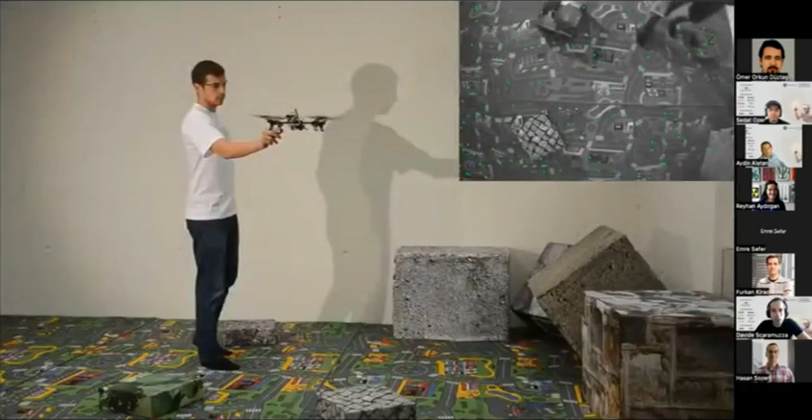What you can see in this video is an autonomous drone using a single onboard camera to stabilize itself. This was a demonstration we gave 13 years ago, in 2009. Here the drone is being disturbed and is able to use a single onboard camera for stabilization. How does it work?

What you can see in the top right video is the onboard video, and you can see that we are detecting key points. These points are basically called features. They are points with high contrast that are easy to redetect when the drone navigates, and we use them as reference points. So if the drone is disturbed, it tries to restabilize by keeping those points exactly where they were detected in the first place.

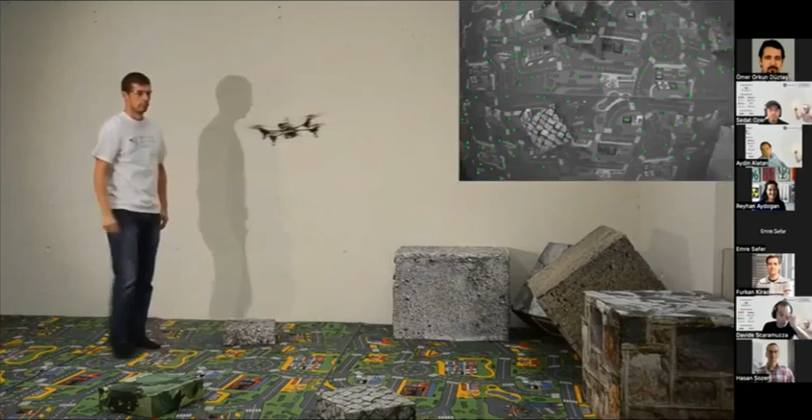The interesting thing is that you can use the same technique to map the environment. Once you have a map of the environment, you can navigate autonomously because you can identify obstacles, and then you can also set waypoints and the destination you want to reach.

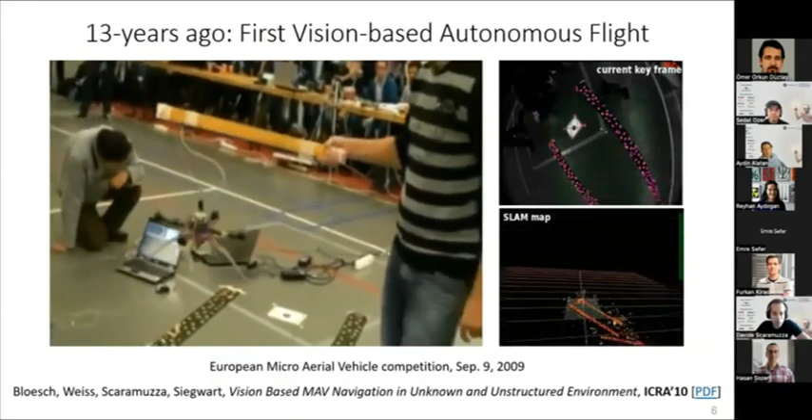This was the first vision-based autonomous flight, September 9, 2009. It was at the European Micro Aerial Vehicle Competition, which we won in the autonomy track. It was the first vision-based autonomous drone.

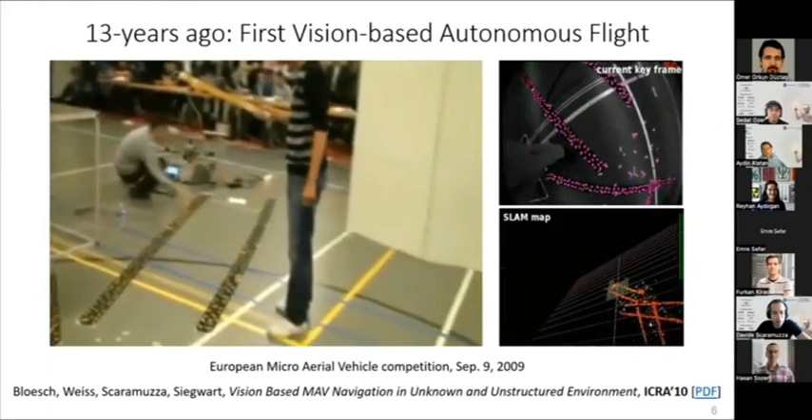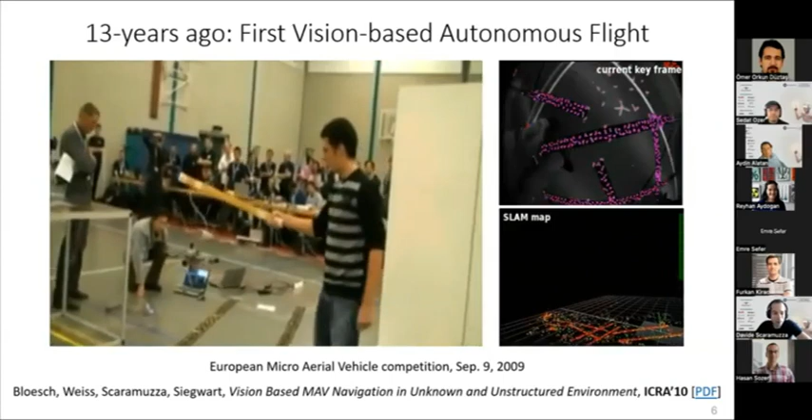At the time, the regulations didn't allow flying drones freely, so we had to secure the drone with a fishing rod, which you see here. The drone was autonomous, but was just secured in case things wouldn't turn out nice.

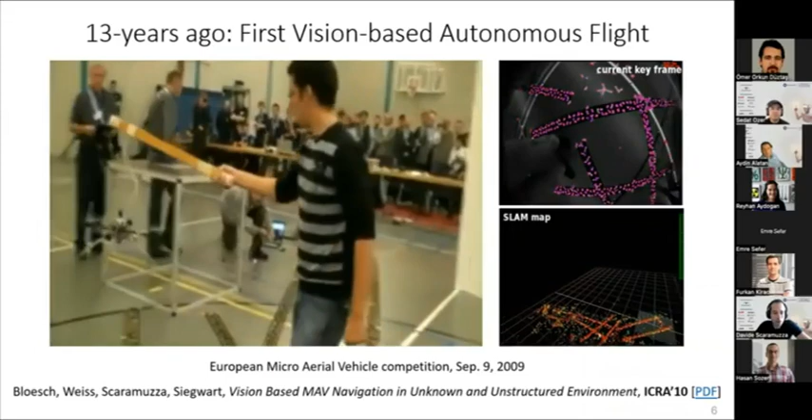Also, at the time, the computing power to do the whole mapping and motion estimation was not capable of running onboard, only offboard. So we streamed the images to an offboard laptop using a 20-meter long USB cable.

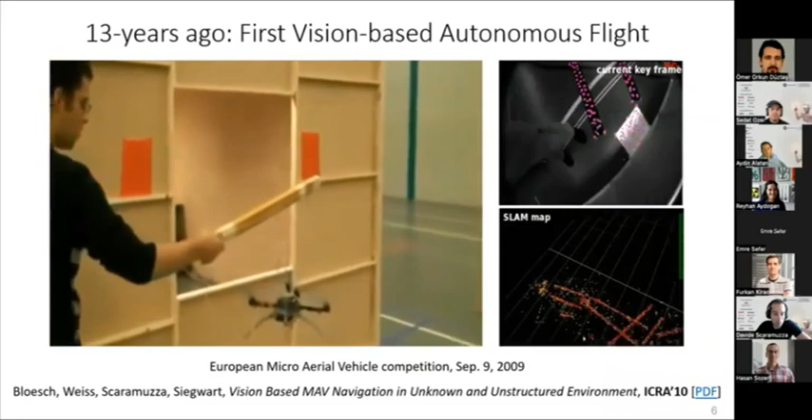Here comes the moment when the drone is supposed to enter a small window. First we pass the fishing rod, and then the drone passes. On the right, you can see basically what the drone sees. On the top right, the camera onboard the drone with the detected features, and in the bottom right video, you can see the map being expanded in real time.

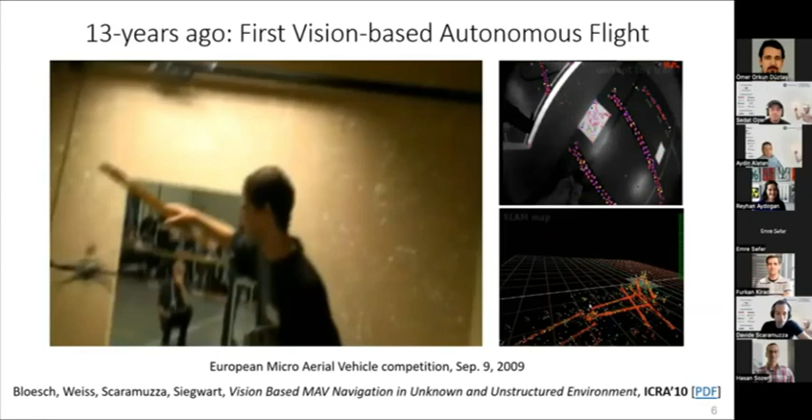So this was in 2009, 13 years ago. Where is this technology now? Well, the guy you see in this picture is Stefan Weiss, who then went to JPL, NASA Jet Propulsion Laboratory, and now this technology is on Mars.

The Mars helicopter Ingenuity, made by NASA, actually uses a similar navigation algorithm that we were using 13 years ago. It uses a single onboard camera and an onboard computer. What you can see in the bottom right is exactly the features it's extracting, so it's building a map in real time that it then uses to stabilize and follow a given trajectory.

So it's been 13 years, but now we can say with confidence that vision-based autonomous navigation is available for the market, and there are several companies that are now using it.

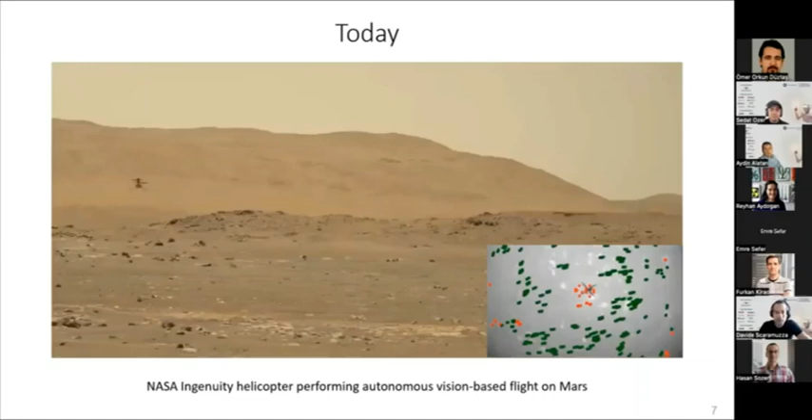For example, a very successful company is a California-based company called Skydio that is using drones for inspection of bridges and difficult infrastructure. What you can see in this video is that the drones navigate only using onboard cameras.

So they can be flown either completely autonomously or with the intervention of a human, but now the human doesn't have to send control commands at very high detail, but rather very high-level commands. For example, move at a constant speed, avoiding all obstacles, and take pictures every 1 meter. So you can now do this thanks to onboard vision-based autonomous navigation.

So now that we have drones that can fly basically autonomously with onboard vision, the question is what's next? As I told you, this was something I was working on 13 years ago, but in the past few years, we are trying to make drones much more agile.

Why? Because if you look at the performance of autonomous drones compared to human pilot performance, there is a huge gap. To see what I mean, look at this video.

What you can see in this video is not an autonomous drone, but a drone piloted by a human pilot. There is a camera onboard the drone that transmits images with 10-20 milliseconds latency. Then the human brain processes these images. The human brain is quite slow, it takes 220 milliseconds, and then computes control commands that are sent via the remote controller.

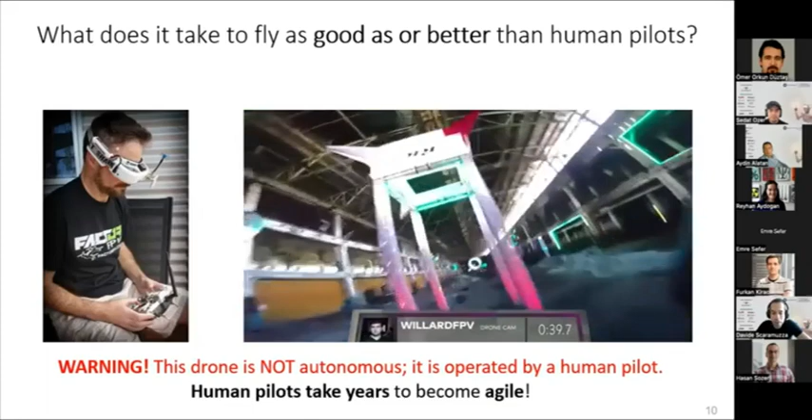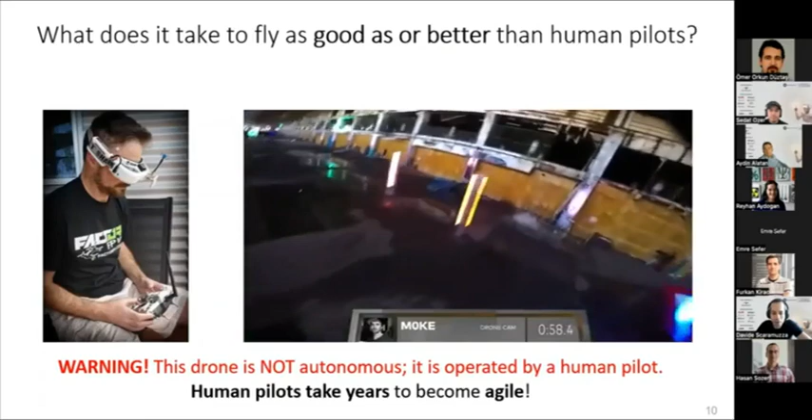What is very interesting about human pilots is that they're able to navigate at impressive speeds using just onboard cameras, so basically vision-based, and all this with incredible robustness, despite the motion blur and high dynamic range changes that occur at these speeds, and also despite the latencies involved.

So the question I've been trying to answer over the past few years in my lab is: what does it take to fly as good or even better than human pilots? We call this problem agile flight.

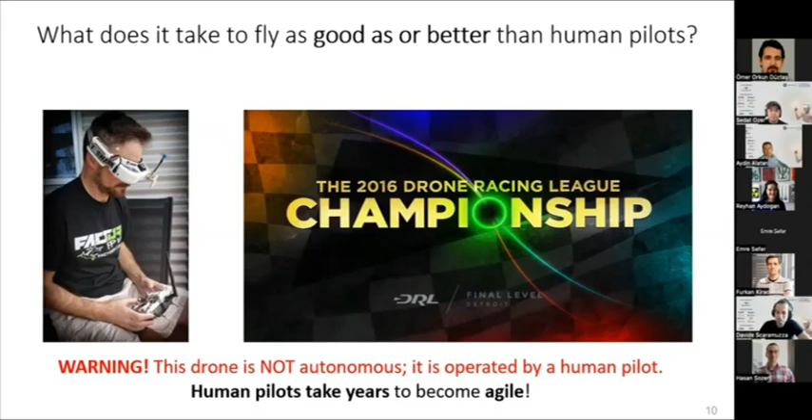And you may ask, why do we care about flying agile? Well, the first reason is actually purely practical.

By making drones faster, they will be able to actually fly longer distances. So making drones faster increases their range. You can see what I mean in this plot, showing distance flown in kilometers versus flight speed in meters per second, from 0 to 10 meters per second. The drone we're reporting here is a DJI Phantom drone.

You can see that in many inspection tasks, the drone is controlled at very low speeds of half a meter per second, which means it can fly only for less than half a kilometer. But as you fly the drone faster and faster, you can cover longer distances. By the way, these distances are calculated exactly as explained in a paper we just published, considering the maximum battery life of the drone.

The problem is that the battery life of a drone dies after 20 or 30 minutes, depending on the type of drone you're using. So if you fly at very slow speeds, you can cover very small distances. But if you fly at faster speeds, you increase their range, and so the utility of the drone.

You can see that if you fly at 6 meters per second, you can reach distances of almost 3.5 kilometers. However, if you fly faster than 6 meters per second, the maximum distance you can reach before the battery dies reduces again. Why? Because at faster speeds you have more drag, the resistance from the air, and you're consuming more energy. So the bottom line of this plot is to show that it makes sense to fly drones faster to improve their utility.

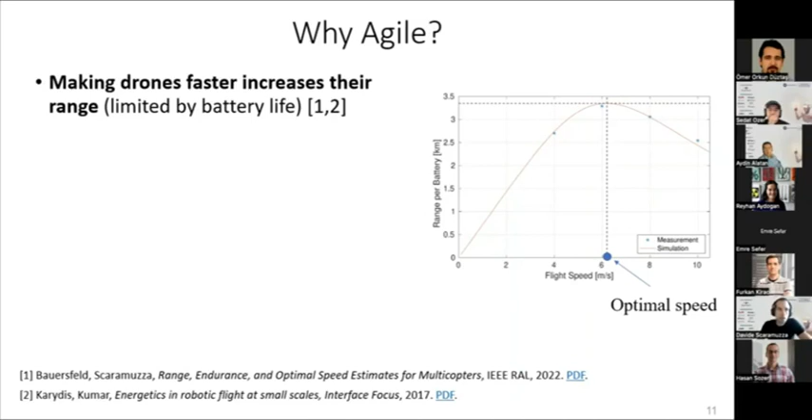Another reason why we care about making drones agile is for all those missions that are time critical. For example, search and rescue, delivery of packages, inspection and exploration, flying cars, and also space exploration.

Another reason is purely intellectual. Flying agile raises very difficult challenges for robotic research, especially for perception, planning, learning, and control. For me specifically, and all the people working on computer vision, it allows us to push the limits on vision-based navigation. That's why I love this research topic.

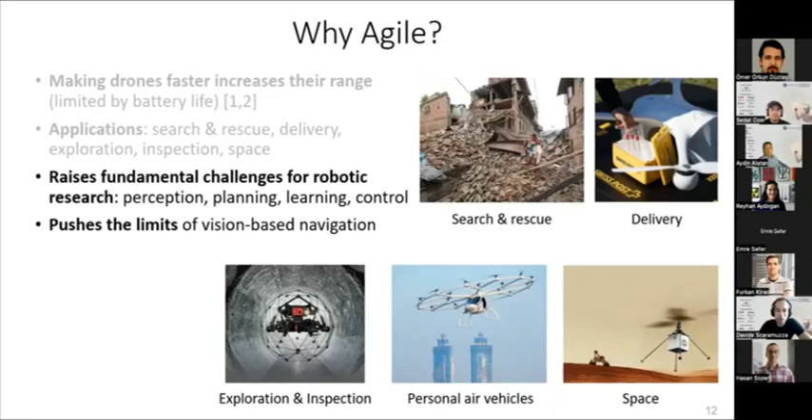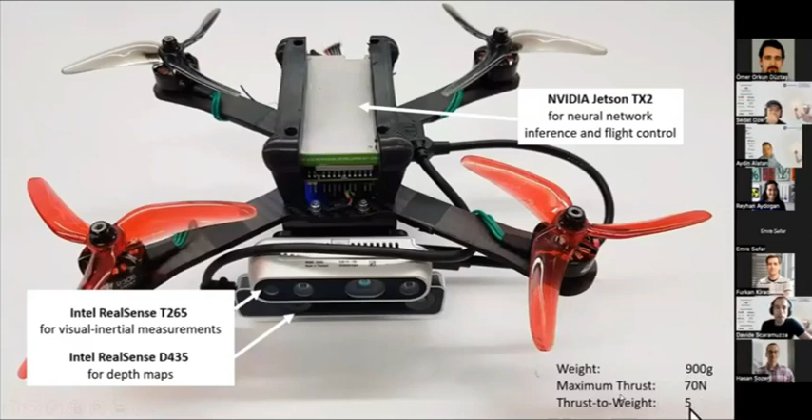This drone can accelerate from 0 to 100 kilometers per hour in less than 1 second, and can reach speeds over 130 kilometers per hour. It has a weight less than a kilo, maximum thrust of 70 newtons, and a thrust-to-weight ratio of 5. So it's quite agile, very capable.

Now, how do you control a drone? You control a drone very much like you control any other mobile robot. At the input are sensor inputs, which means, for example, images and inertial measurement units, which are inertial sensors. Then there are three modules: perception, planning, and control.

Perception typically does state estimation, computing the position, velocity, and attitude of the drone. It also computes local maps to identify obstacles around the environment that you want to avoid. This information is then sent to the planning module, which computes a collision-free trajectory that is executed by the control module, which then computes the low-level control commands, for example the rotor speeds.

Now, there are several issues with this architecture, because despite having been used for 40 years in robotics for mobile robots, it actually has some shortcomings for agile autonomous flight.

The first issue is that when you navigate very fast, you're going to have very imperfect perception. This is because at high speeds you have a lot of motion blur, light changes, and also the limited field of view will cause many of the features needed for estimation to fall outside of the field of view.

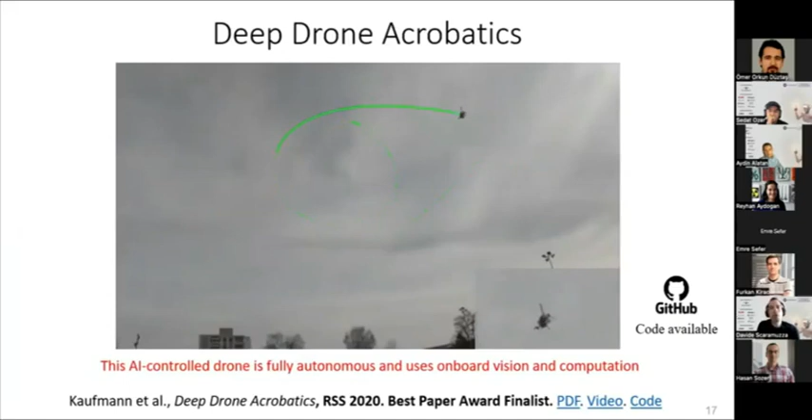I hope you can see the video. In this work, we were able to train a neural network that takes images as input and maps them directly to control commands to achieve agile acrobatic maneuvers similar in speed and acceleration to those performed by expert human pilots. For these maneuvers, the drone reaches accelerations of up to 3 Gs, exactly what human pilots experience. All this was done using an onboard camera and an onboard computer.

If you're interested, the code has been fully available for more than a year, and all the datasets have been made available too. How did we train it? We trained it only in simulation, meaning we did a one-shot sim-to-real transfer. We transferred the trained policy to the real world without any fine tuning.

What you can see is the simulation that we actually did. We used Gazebo in this case. We simulated hundreds of drones tracking hundreds of different aggressive maneuvers, simulating basically 50 flight hours for each drone in just 5 hours. So within a night, we were able to train this algorithm. Once it was trained, we downloaded the network and deployed it to the real drone.

We show in the paper that it transferred not only to real drones, but also to different real drones. Here you can see that the same policy trained in simulation transferred exactly identically to the real world. But now the key question when you train in simulation is, how do you make sure it transfers to the real world? There is no guarantee that it will work in the real world. Well, first of all, we have very good physics and modeling of the drone.

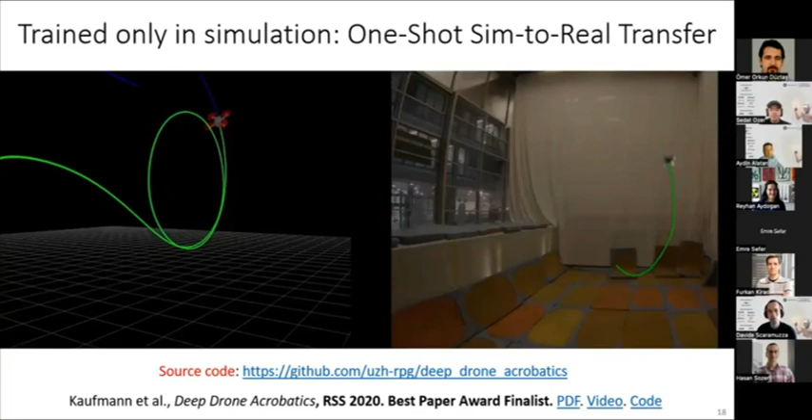But how did we actually train a neural network in the first place? We trained it using privileged imitation learning, meaning the neural network tries to imitate the control commands output by an artificial expert. It's trained exactly as you would train a kid to mimic its parents: the network predicts commands that you want to match with the control commands output by the artificial expert.

So what is the expert? The expert is not a human pilot—you don't want to mimic human pilots because you want to be better than them. So we use an artificial expert, meaning an algorithm that knows how to solve the task. For example, in this case we used model predictive control, MPC, nonlinear model predictive control.

However, this expert is privileged. What does it mean that an expert is privileged? It has perfect knowledge of the robot state and of the environment. Now the question is, how can an algorithm we use for training have a perfect knowledge of the robot state and environment?

It can, if you do the training in simulation. In simulation, we know perfectly the position, velocity, and attitude of the drone, exactly where we want to be, and we know perfectly the environment. So we try to imitate the control commands output by this expert—in other words, we distill the knowledge of the artificial expert into a neural network. If you're interested in the details, the neural network we used here was a temporal convolutional neural network.

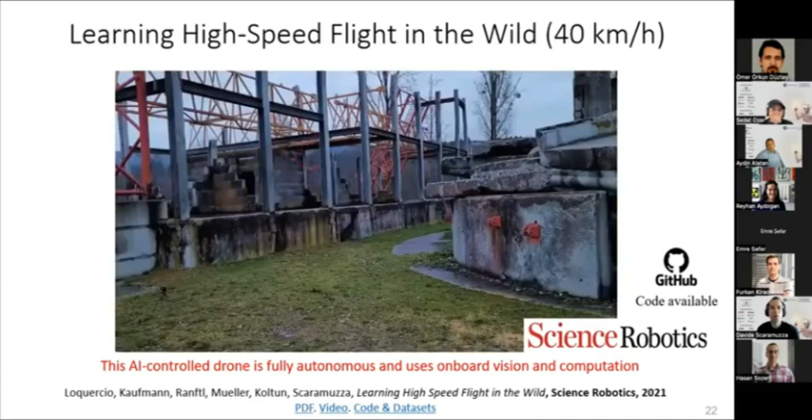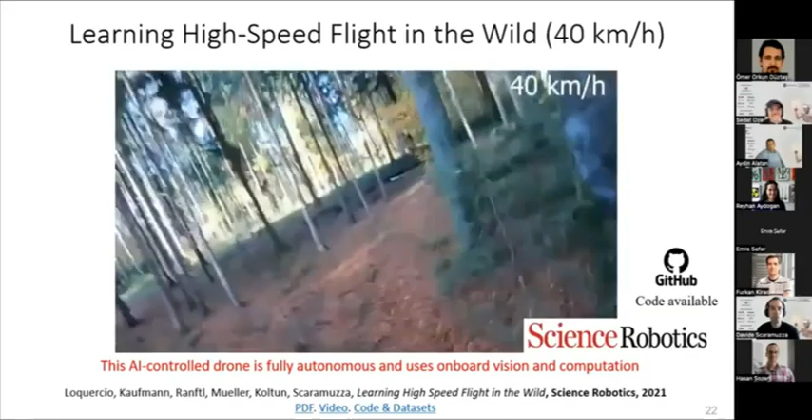Let me start with a video as usual. What you see here is our drone navigating in a forest, flying very fast. In this case it was actually pillars outdoors, here it's exiting a hangar. This one is a commercial drone called the Skydio, and this one is again our autonomous drone. We could fly at speeds up to 10 meters per second, which is almost 40 kilometers per hour.

We could also fly with a little bit of fog, again with a vision-based drone. This drone is fully vision-based, using a single onboard camera and onboard computer—the same computer and sensor I showed you before, a Jetson TX2. And all the data sets and code are available open source on GitHub—just look for the paper.

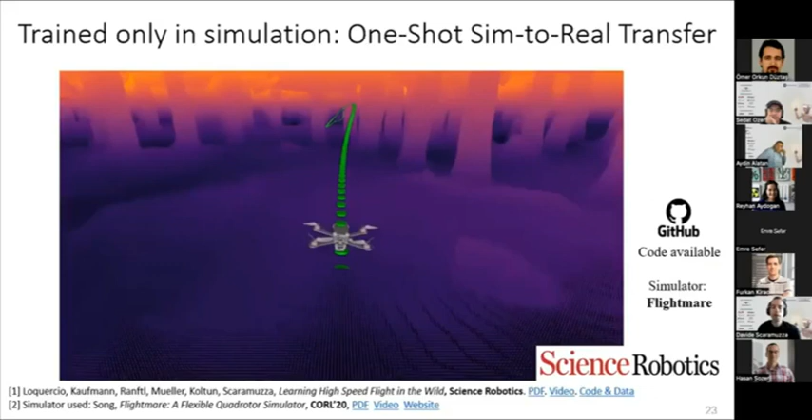Now, how did we train it? We trained it in simulation. We use a simulator called Flightmare that we open sourced two years ago.

Why simulation? Because simulation is fast, it's cheap, and especially it's safe. You can generate almost unlimited amounts of data in just a few hours, and it's super safe because you don't hurt any people or the environment. You cannot fly and train drones in the real world because it would be significantly dangerous. But you can do this in simulation.

Let me show you the simulation environment in this video. Basically, it's a simulated forest. Where did we get this from? We bought it from scenarios available for video games like Unity. There are hundreds of different forests you can download for just 50 euros. We downloaded a few forests, imported our drone, and brought the simulated scenario into our Flightmare simulator.

Then we trained our algorithm using imitation learning, trying to imitate an artificial expert. In this case, the artificial expert was a model-based algorithm with privileged knowledge about the environment. It knows perfectly the state of the drone—its position, velocity, and attitude—and it knows the position, diameter, and density of all the trees, so it knows exactly where all the obstacles are. This is possible because in simulation this is a privileged algorithm.

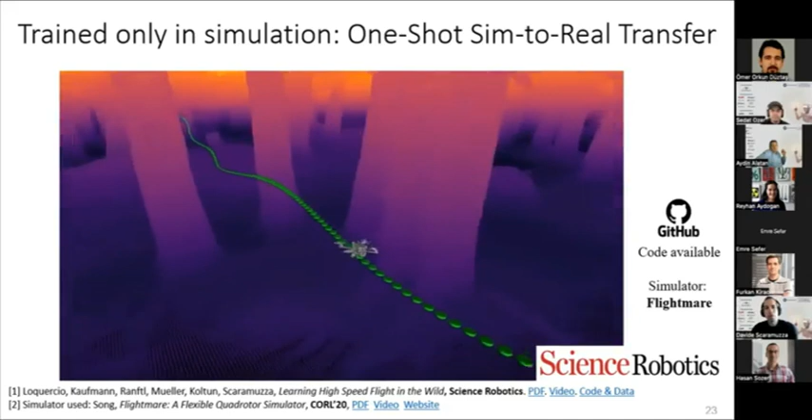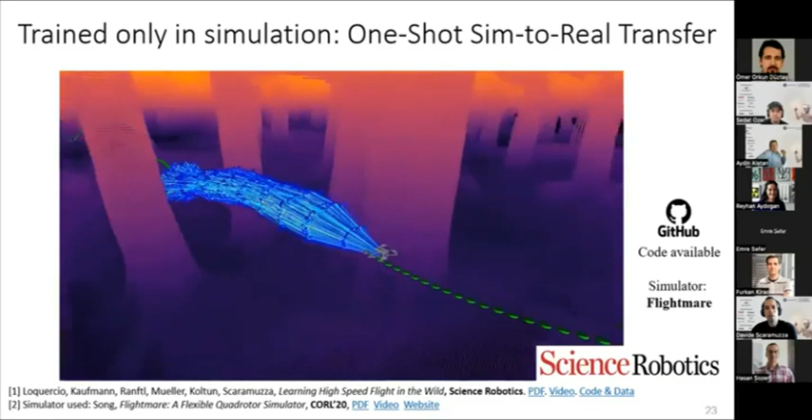So what do we do? In simulation, we can generate a collision-free global trajectory that flies the drone safely from start to finish. You could train the neural network to imitate the control commands needed to fly this single global collision-free trajectory. But we don't do that, because we want the trained policy to also cope with ambiguities in the real world.

For example, when you have two slits, where do you go—left or right? If you train on a single trajectory, the drone would basically bump in the middle. So instead, we don't imitate a global trajectory, but imitate a multimodal distribution, which is what you see here.

All these thousands of trajectories form a multimodal distribution that we generate with Monte Carlo sampling. These trajectories are all collision-free within the next 10 meters—since we fly at 10 meters per second, that means they have to be quite fast. We ask the neural network to mimic the distribution of these collision-free trajectories within the next second of flight.

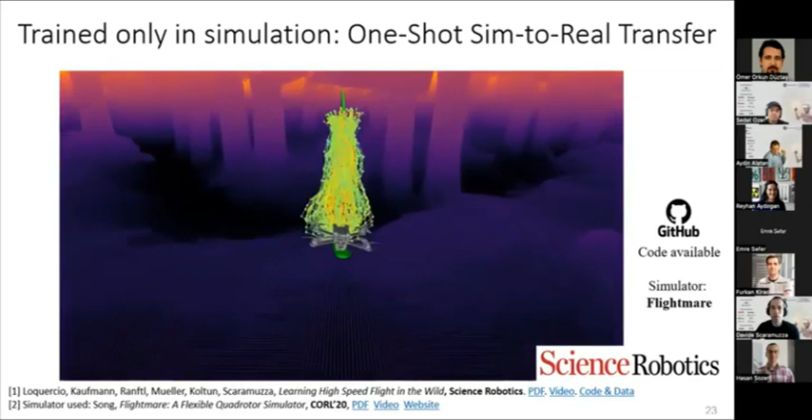But the problem is we want to make sure the network trained in simulation can transfer to the real world without any fine-tuning. How do we make this possible? Remember what we did before? The trick is to use an appropriate sensory abstraction.

Here, as a sensory abstraction, we use depth maps. Depth maps are very similar both in simulation and in the real world—they're independent of texture and color, no matter the season. It doesn't matter whether the tree canopy is yellow, red, or green, because the depth is always the same. It also doesn't matter what color the tree trunk or the ground is, because it only depends on depth. You can immediately perceive that depth in simulation and in the real world looks similar.

Now, the big question is: when you train on depth maps in simulation, since your simulator has perfect knowledge of the environment, you could in principle train on the exact depth map.

Does it make sense on the exact map? Well, we show in the paper that if you train on the exact depth map, it wouldn't work as well in the real world as if instead you train on realistic depth maps. What does it mean, realistic depth maps?

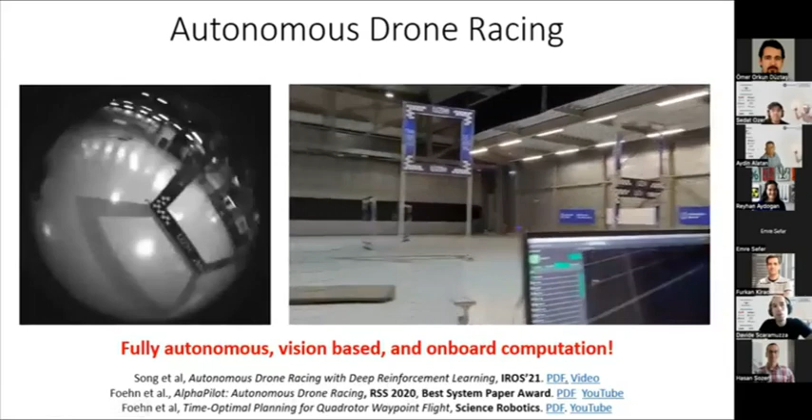And now this one is much more recent. I don't have time to go through the details, but here we use reinforcement learning rather than imitation learning, because we want to beat model-based algorithms too. We found that any model-based artificial expert is actually suboptimal. So the only way is to try to learn models in the real world, and for this we deployed a reinforcement learning approach.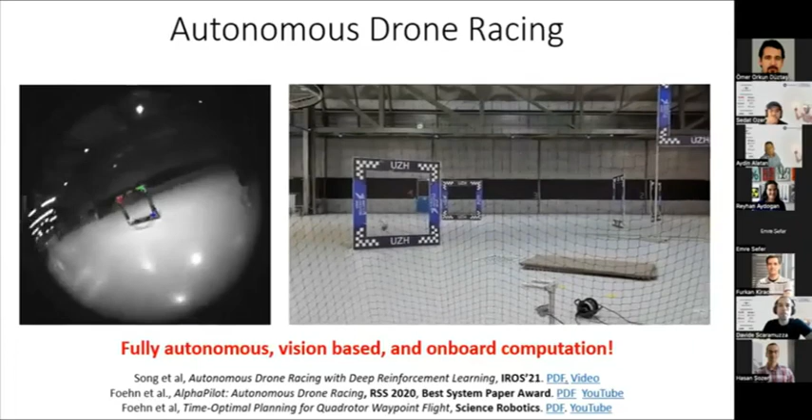Another thing we're working on is trying to beat the best human pilot, which I'm happy to report that we did. We actually invited to Zurich world-class human pilots—in particular, the best human pilot from the US, the best from Australia, and the best from Switzerland. And I'm happy to report that we were able to outrace all three of them in speed.

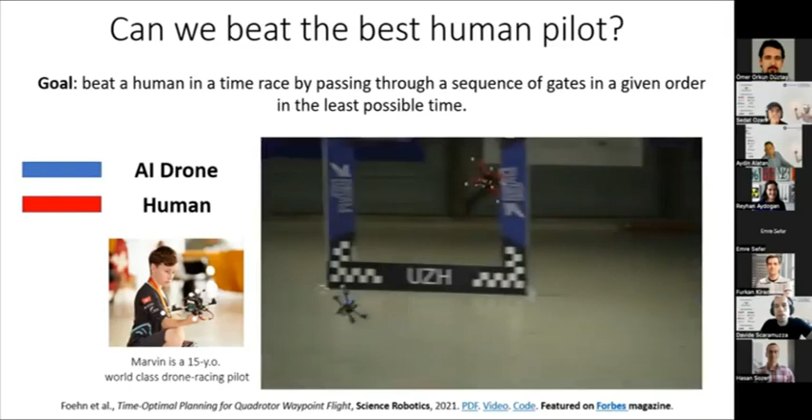Here you can see some close-up scenes from the race. This one is the youngest of the pilots, and interestingly also the most aggressive, Marvin. Marvin surpassed in terms of speed even the US champion and the Australian champion on this track—it really depends on the track. The blue one is the AI drone, and the red one is the human piloted drone. And this is completely vision-based.

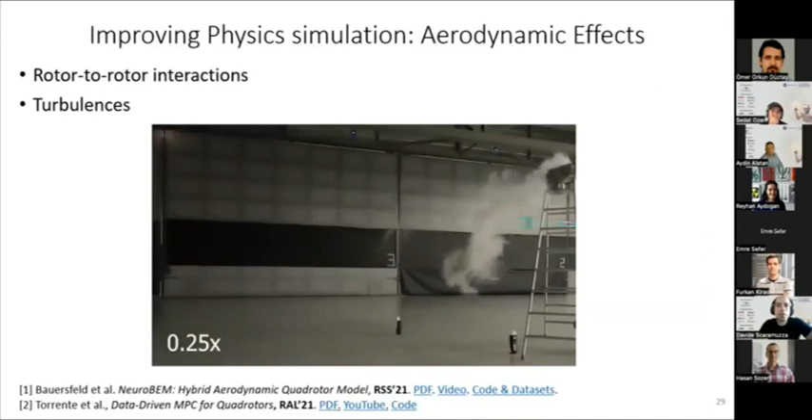Now the big problem when you work on drone racing is aerodynamic effects. See what I mean here: the drone is flying super fast, 70 kilometers per hour, and making a very sharp turn. When you make these turns you generate a lot of turbulent flow. This turbulent flow can only be simulated with computational fluid dynamics, CFD, which would take hours or even days of computation, and it would be trajectory dependent—every time you change the trajectory you'd have to generate new simulations, which is impractical from an engineering point of view. If you want to deploy this for racing, you want to train within 10 minutes, not days, because humans are able to adapt within minutes or hours, not days.

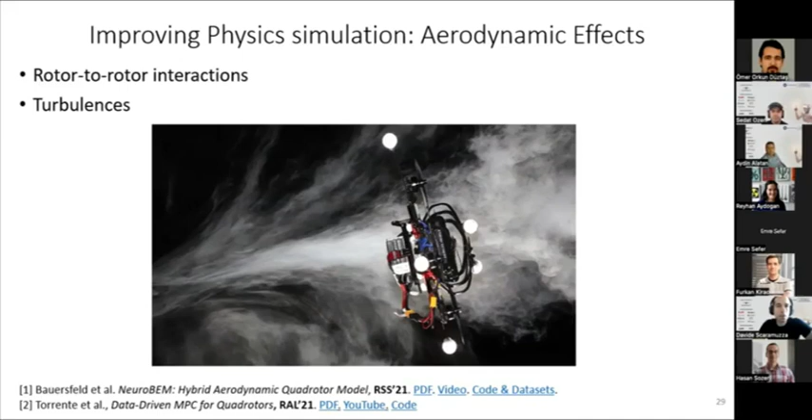So how do we handle aerodynamic effects? You can model linear aerodynamic effects like linear rotor drag and fuselage drag very well. You can also model higher order aerodynamic effects like blade flapping using blade element momentum theory. You can use this to predict, within a certain degree, the forces and torques acting on each propeller. But that only explains 40% of all the residual forces and torques.

So to explain the remaining residuals, we are now leveraging neural networks. This is work we published at RSS in 2021. The idea is that we use a neural network, in particular a temporal convolution neural network, to model the residual forces and torques that cannot be explained by the first principle blade element momentum theory. So we train a neural network—how do we train it? In this case, we train it with supervision.

We have a flight room where we can record the trajectories executed by the drones, so we can compare the executed trajectory with the trajectory estimated by the dynamical model of the drone, using the blade element momentum theory model. Then we use the neural network to model these residual forces and torques—basically modeling the residual gap. By doing this, we can improve the realism of our simulator by up to 60%. So we're realifying our simulator, and then we can fine-tune in simulation and deploy again in the real world.